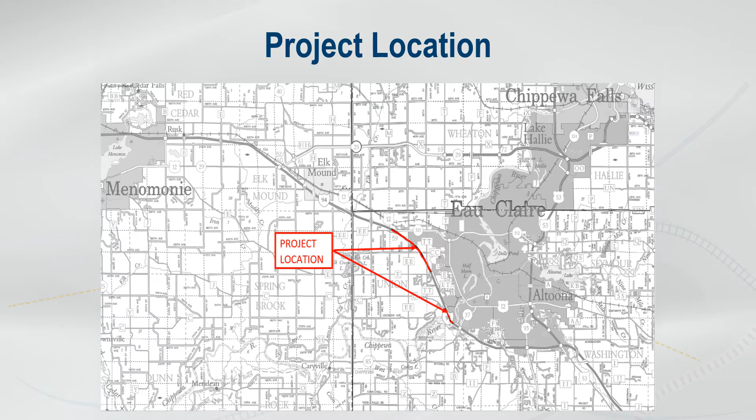The proposed project on Interstate 94 begins near the Wisconsin 312 County EE interchange in the Eau Claire County town of Union and heads east for approximately 5.6 miles to the Chippewa River Bridge.

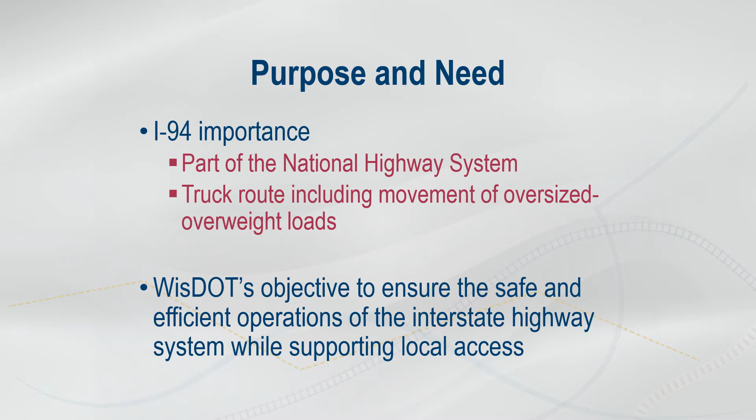Interstate 94 is an important part of Wisconsin's transportation system. It is part of the national highway system and is classified as a principal arterial route. I-94 serves as a truck route, including the movement of oversized, overweight freight loads in this part of the state, and serves local commuters and businesses throughout northwestern Wisconsin. It also provides a critical link to the state of Minnesota. The department's objective is to ensure safe and efficient operations of the interstate highway system while also supporting local access.

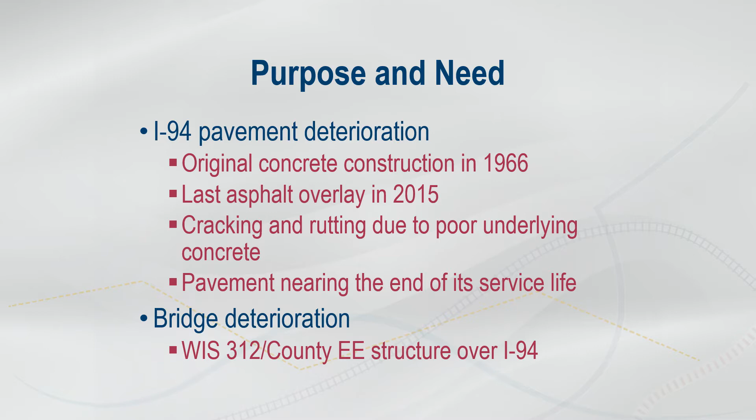The primary need for the project is the condition of the pavement. This segment of Interstate 94 was built in the mid-1960s, and its pavement is nearing the end of its service life. The last asphaltic overlay was completed in 2015. There is cracking and rutting throughout the project limits due to the poor underlying concrete. In addition, the bridge on the Wisconsin 312 County EE overpass over I-94 is deteriorating.

Pavement improvements are recommended to keep traffic moving safely and efficiently along I-94. A pavement replacement alternative is proposed along the section from Wisconsin 312 County EE to County E, as additional asphaltic pavement overlays are no longer a cost-effective solution for this piece of the corridor. A pavement replacement alternative best addresses the needs of this section while balancing the long-term investment into the roadway system.

The existing alignment, the number of travel lanes, and the existing interchange configuration are all proposed to match that of the existing roadway. The vertical profile of I-94 is proposed to be lowered under the Wisconsin 312 County EE overpass to provide vertical clearance that meets current standards.

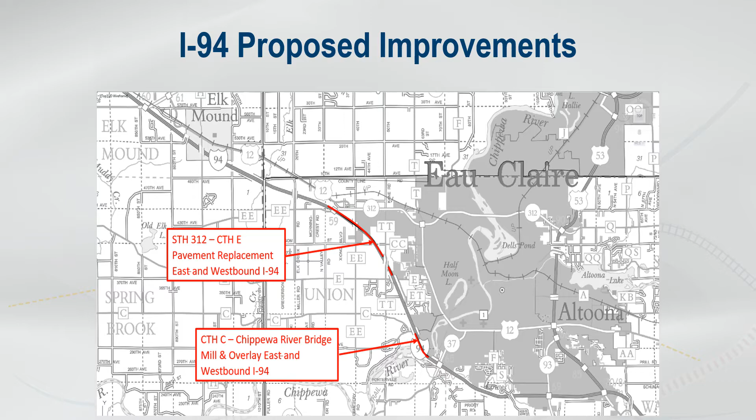The section of I-94 from County C to the Chippewa River Bridge will have the concrete base layer patched, and the asphalt pavement will be milled and overlaid with 4.5 inches of asphalt pavement.

The proposed improvements for the Interstate 94 corridor include placing new concrete pavement along I-94 between Wisconsin 312, County EE, and County E, and milling and resurfacing the existing interstate with new asphalt from County C to the Chippewa River Bridge. In addition, the mainline asphalt shoulder pavement marking and shoulder rumble strips will be replaced, high-tension median cable barrier will be installed, and guardrail and deteriorated culverts will be replaced as needed.

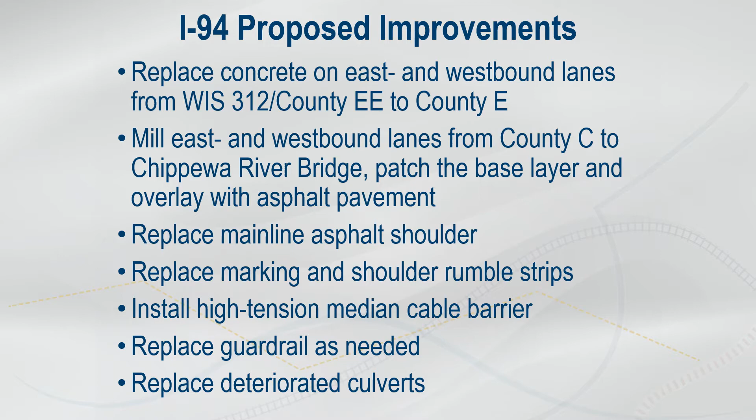Work at the Wisconsin 312 County EE interchange includes improvements to the Wisconsin 312 County EE bridge and roadway. It also will include improvements to the southeast ramp, southwest ramp, and the southwest loop. Work on the northwest ramp, the westbound I-94 on-ramp, will not be included in this project.

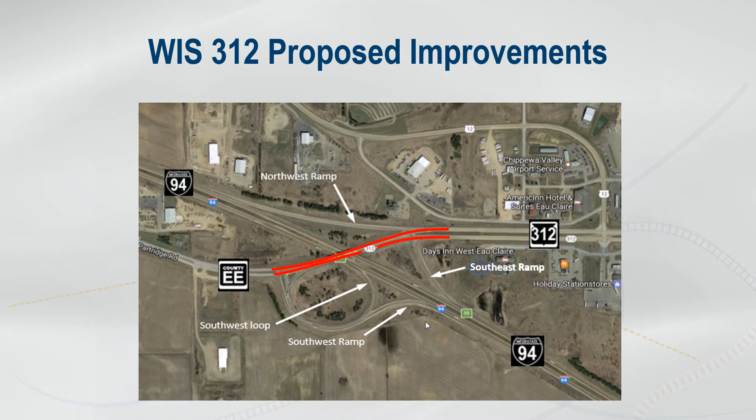The improvements to the Wisconsin 312 County EE structure include replacement of the joints at each end of the bridge, curb repair and replacement, and a concrete deck overlay.

The Wisconsin 312 County EE roadway will have the asphalt pavement replaced from the southwest ramp, which is the eastbound I-94 on-ramp, to the southeast ramp, which is the westbound I-94 exit ramp.

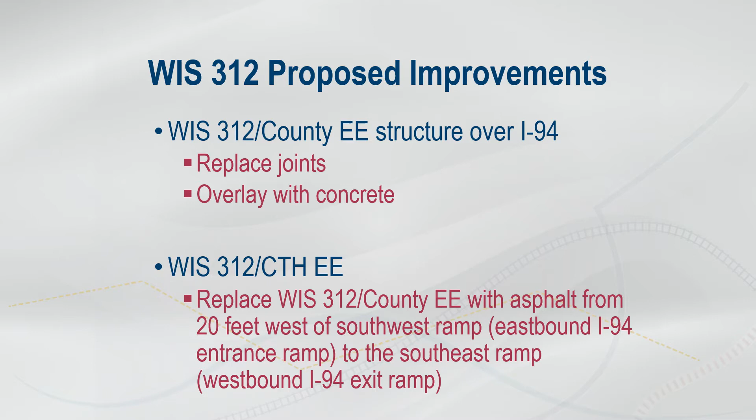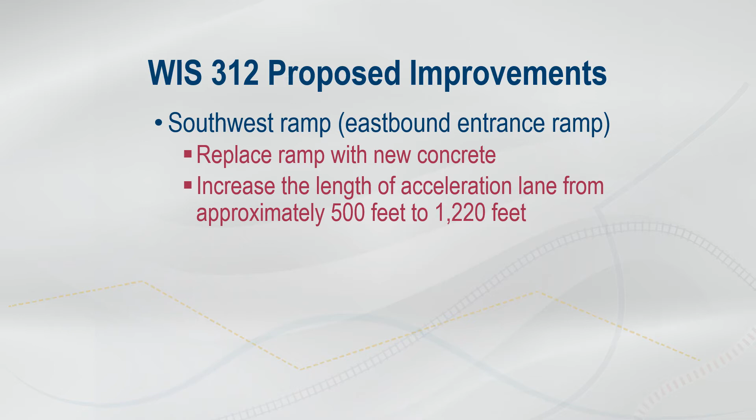On the southwest quadrant of the interchange, the southwest ramp pavement will be replaced with new concrete pavement. The length of the on-ramp will be increased from approximately 500 feet to 1,220 feet. This acceleration lane will be built as a parallel acceleration lane instead of a taper as it is currently built. A parallel acceleration lane will allow vehicles to gain speed before entering into the main lanes of interstate traffic.

Also in the southwest quadrant is the southwest loop, or the eastbound I-94 exit ramp. This ramp also will be replaced with new concrete. This exit ramp will be reconstructed from a tapered exit ramp to a parallel exit ramp. This type of design will allow vehicles to completely exit the main lanes of interstate traffic while decelerating.

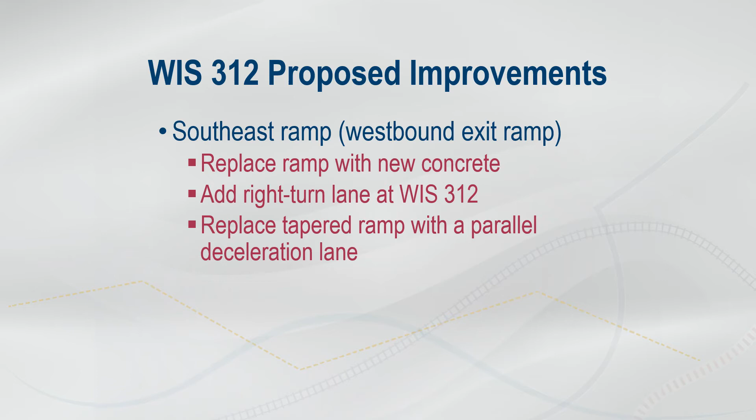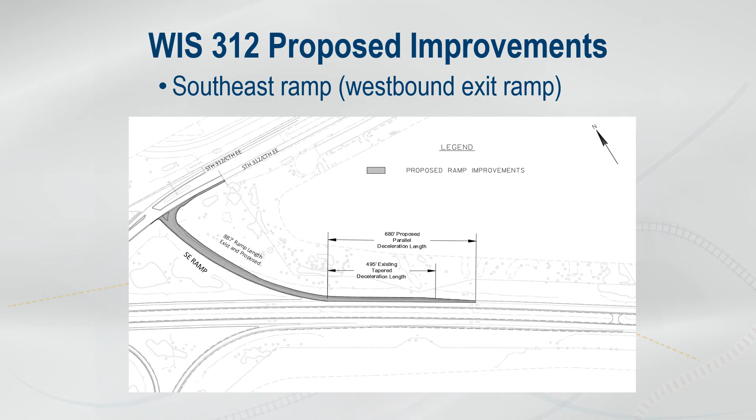The southeast ramp, which is the westbound I-94 exit ramp, will be replaced with new concrete also. In addition, this ramp will have a right turn lane added for vehicles turning onto Wisconsin 312. The southeast ramp will also have the deceleration lane modified from a tapered lane to a parallel exit lane, which again is to allow vehicles to exit the main interstate lanes sooner while decelerating.

The project is currently scheduled to begin in the spring of 2022. The following work will be completed during this construction season.

The first operation will be to build temporary crossovers and complete temporary widening, which will accommodate traffic during the pavement replacement operations. The concrete on the westbound interstate lanes and the southeast interchange ramp at Wisconsin 312 County EE will be replaced, and the lane changes on the southeast ramp will be built.

In addition, the east and westbound interstate lanes from County C to the Chippewa River Bridge will be milled and resurfaced. On Wisconsin 312 County EE, the joints in the Wisconsin 312 County EE bridge over I-94 will be replaced, and the deck will be overlaid with concrete. Finally, the asphalt pavement on Wisconsin 312 County EE and the concrete curb and gutter will be removed and replaced.

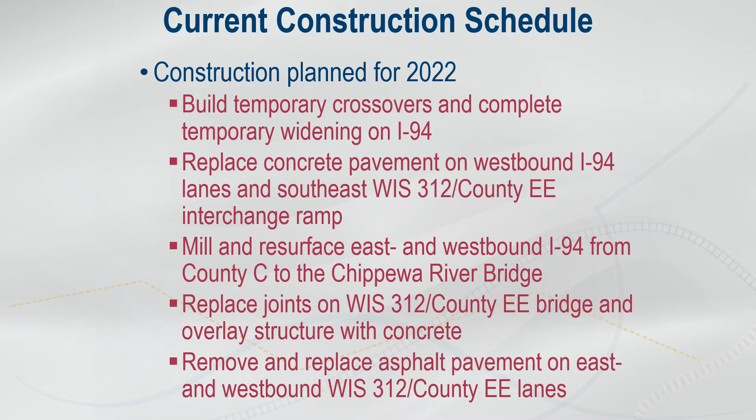The work planned for 2023 is to replace both lanes of eastbound I-94, the southwest ramp, and the southwest loop with new concrete pavement. To wrap up the project, the temporary crossovers will be removed and restoration work will be finished.

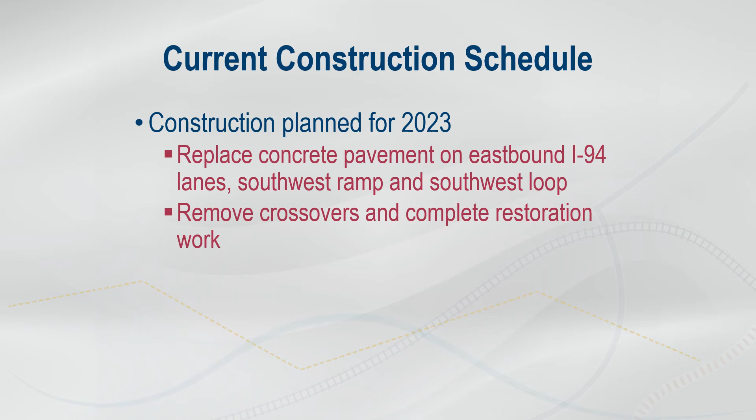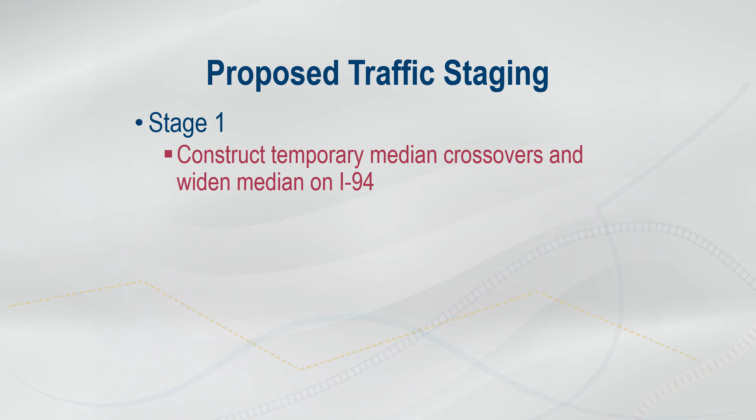Stage 1 of the project is planned to begin in the spring of 2022, during which the temporary median crossovers and temporary widening of I-94 will be constructed. 4 lanes of traffic will be maintained with single lane closures during non-peak volume times.

Stage 2 will begin after Labor Day in the fall of 2022 and be completed by late October. The westbound I-94 lanes from Wisconsin 312 County EE to County E and the southeast ramp will be replaced during this stage. Traffic will run 1 lane each way, counter-directional on the eastbound lanes.

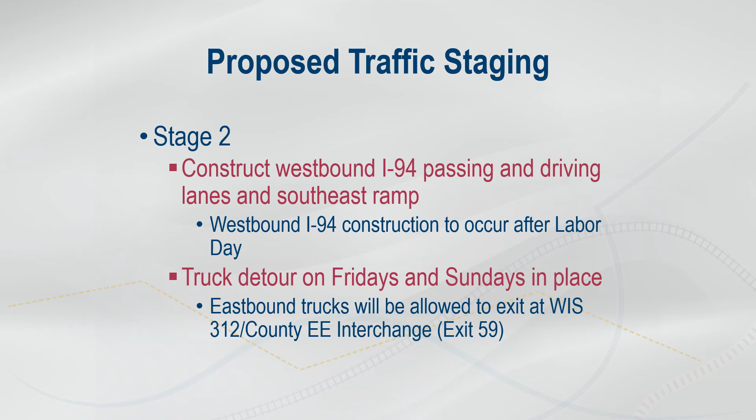There will be a mandatory truck detour in place from 10 a.m. to 6 p.m. on Fridays and on Sundays. Eastbound trucks will also be allowed to exit at the Wisconsin 312 County EE interchange, which is exit 59, during this stage.

Stage 3 operations are the concrete pavement replacement of the eastbound I-94 lanes from the Wisconsin 312 County EE interchange to County E, the southwest loop, and the southwest ramp at the Wisconsin 312 County EE interchange. This work is currently planned to begin in April of 2023 and be completed prior to Memorial Day weekend.

Traffic during this stage will be run 1 lane counter-directional on the westbound lanes. There will be a mandatory truck detour from 10 a.m. to 6 p.m. on Fridays and on Sundays. Eastbound trucks will also be allowed to exit at the Wisconsin 312 County EE interchange, which is exit 59, during this stage.

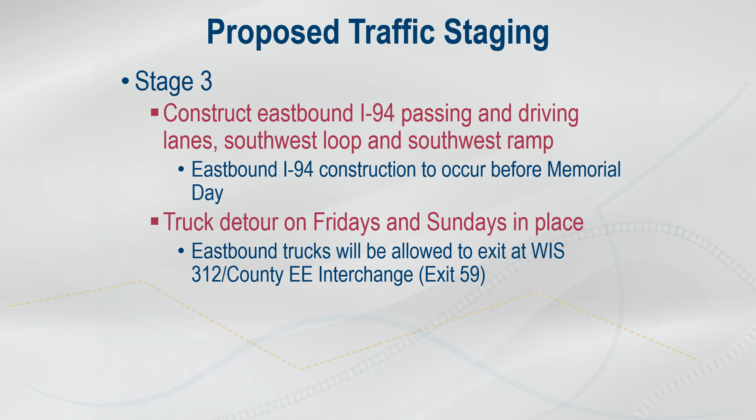During the pavement replacement stages, there will be a mandatory truck traffic detour on Wisconsin 29 East to US 53 South. Eastbound trucks will have access to the Wisconsin 312 County EE interchange at exit 59.

The truck detour will be in effect during the fall of 2022 after Labor Day until late October, while the westbound concrete pavement is replaced. The hours of this detour will be from 10 a.m. to 6 p.m. on Fridays and on Sundays.

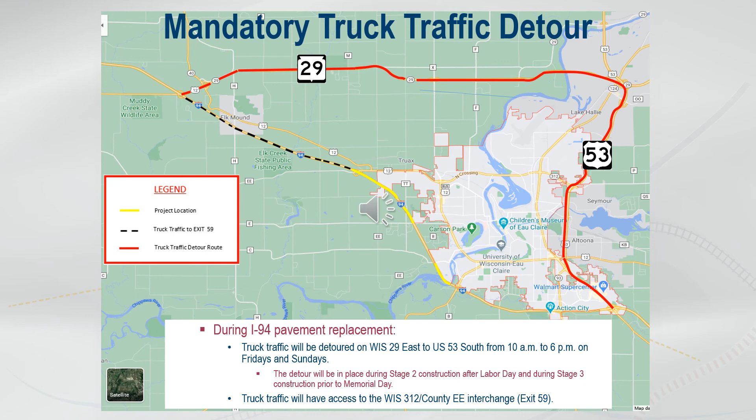This detour will also be in effect in the spring of 2023 from mid-April to Memorial Day weekend. The eastbound concrete pavement is scheduled to be replaced at this time. Once again, the hours of this detour will be from 10 a.m. to 6 p.m. on Fridays and on Sundays. Eastbound trucks will also be allowed to exit at the Wisconsin 312 County EE interchange at exit 59.

The remaining work will be completed using single lane closures. This includes the milling and resurfacing of the east and westbound interstate lanes from County C to the Chippewa River Bridge, the bridge joint replacement and deck overlay on the Wisconsin 312 County EE bridge, and the asphalt pavement replacement on Wisconsin 312 County EE. This is currently scheduled to be completed during the 2022 construction season.

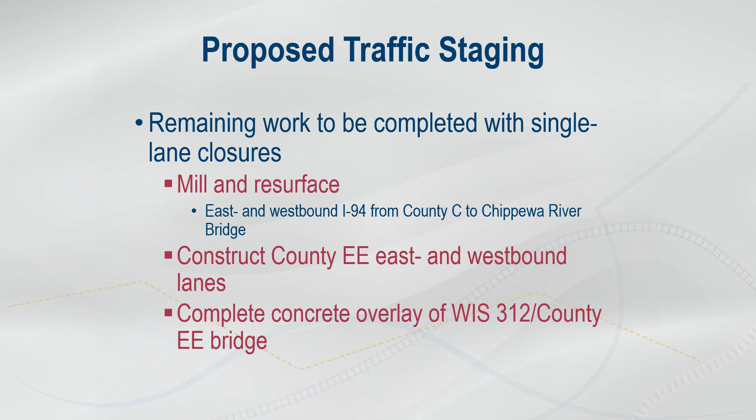The work required for the proposed improvements is anticipated to be performed within the existing highway right-of-way. The right-of-way fencing is proposed to be replaced in spot locations where needed. If the fencing holds livestock, we ask that you please contact the Wisconsin DOT project manager as provided at the end of this presentation. Her contact information is also available on the project website. Coordination for fencing replacement will occur with you during construction.